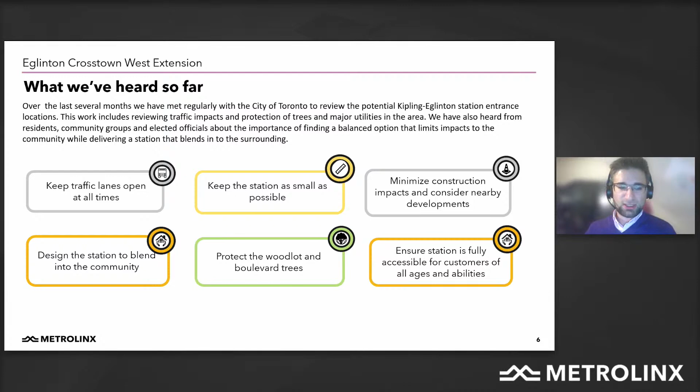So just going into the next slide, when we think about stations in general, and just to be clear, we're in the planning and design phase on the stations. This is all about us landing on where we want to put the station building, and ultimately how the station will function. We're not in a contract right now to build these stations, so this is the right time to get your feedback.

So we are thinking about how to make these stations, first of all, work and be easy to use and connect people well in terms of travel time and connectivity, how to connect with the local community, and how to protect the environment, while at the same time thinking about how we limit the impacts to private property, transit and traffic, and also deliverability. How hard is the station to build? And that also relates to the community impact. So the things that we've heard and our typical key considerations during the design phase actually line up pretty well.

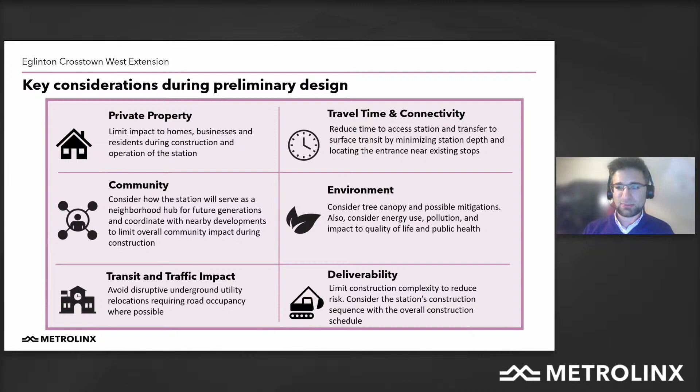And so if we move to the next slide, please, getting a little bit into our design principles. Can we advance the slide, please? Thank you. So a number of key design principles when we approach stations on our transit projects, and I will relate this to Eglinton Crosstown West. It needs to work in terms of helping to create an effective and reliable transit line, and also be passenger focused so that it's easy to use. User-centered design is this idea that people can easily understand how to use the station and that it's accessible and safe.

And these next two, number 3 and number 4, are in gray because they really get highlighted in the options that we'll be bringing forward. So public realm benefits and placemaking. You'll see in the options that there are ways we can use the scale of the buildings, the orientation, and the public realm aspects to highlight the local area. And a question that we're interested in hearing about as we solicit feedback is how do you think people will use this station?

Is it really just an in and out kind of place to access transit, or is it also about helping to create more of a place at Kipling and Eglinton? And then, as we've heard, context and integration.

So while these stations do need to, from an architectural perspective, speak to the other stations that are being built on Eglinton Crosstown, which are almost complete, and I'm sure many of you have seen what those look like. They do need to speak to those stations architecturally. That doesn't mean they need to be exactly like those types of 3-story Crosstown stations, so that there can be more thinking about how it blends in with the local context.

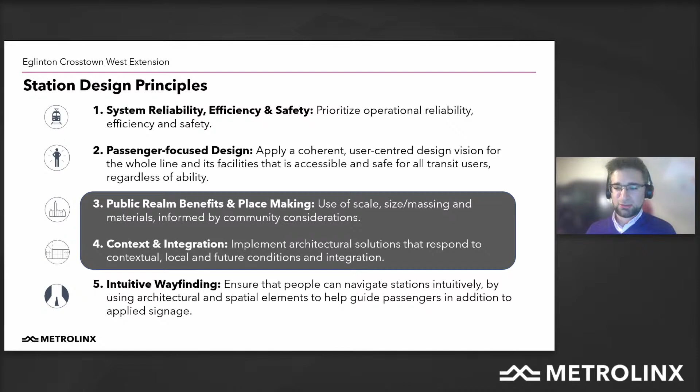And then the last point around intuitive wayfinding and making sure people can navigate easily. So if we go to the next slide, one of the comments and questions that we have heard from the community is, can you please make this station at Kipling and Eglinton as small as possible? There's a lot of natural features in the area with the woodlot, and just make it blend in and almost fade into the background, in some of the comments that we've received.

We're taking that into account, but we do want to highlight that there are important elements in each station that influence the size and shape. So it needs to be in line with the principles about being usable to customers, to all people with all different abilities. We need to provide elevators, barrier-free paths of travel, stairs and escalators, and circulation in a public space. And we also need to provide both a main access point and an emergency exit building, so that there are 2 points of egress in the case of an emergency.

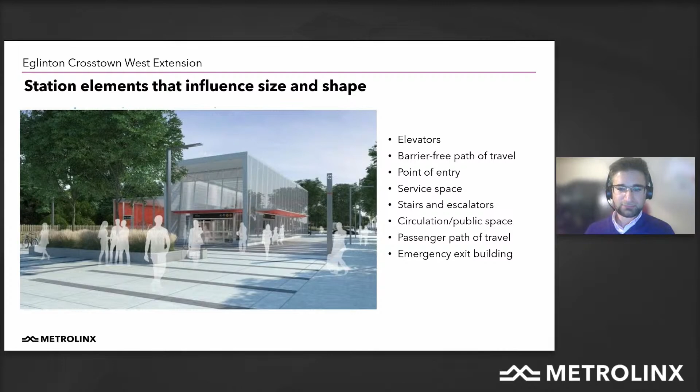So those are all factors that need to be considered, but I think you'll see as we get into the options, we have really tried to keep the station functional, but keep the buildings itself on the smaller side. And as well, our approach on the 4 underground stations is to really focus on one main station entrance building, so there's not a whole bunch of different station entrances. So the next slide, please.

So as I mentioned, we're into our design stage. We have not let a contract to build these stations yet. This is really the right time to get your input, and we have 3 different options for the station location that we'll be presenting. 2 we really think have a potential to be advanced forward. 1 has some pretty challenging constructability constraints, but this is really the opportunity for us to get your feedback on what you want to prioritize, and to hear how you think you would use it.

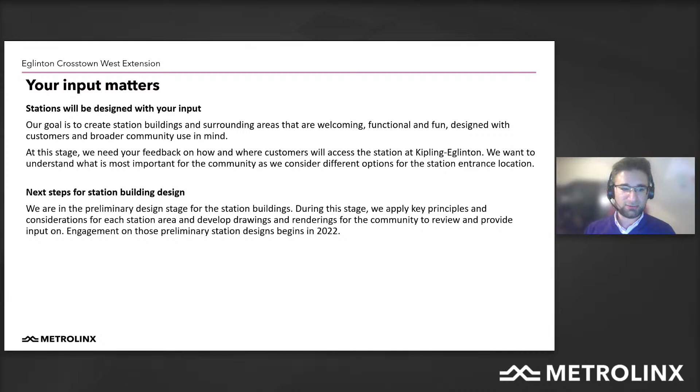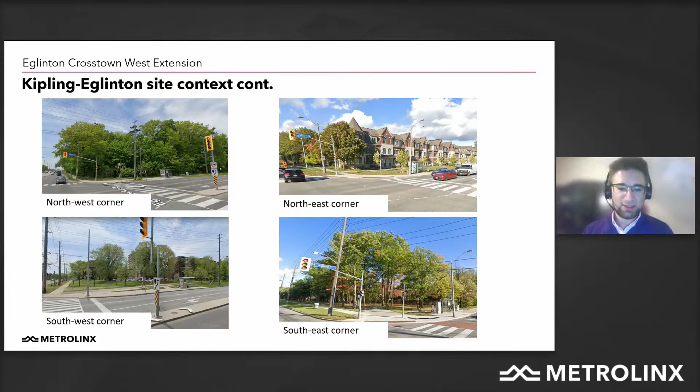And then just a little bit on the context. I'm sure many of you on the line are very familiar with the corner of Kipling and Eglinton. At the northwest corner is the Woodlot. At the northeast corner, you can see the townhomes that come pretty close to the street. On the southwest corner, there's kind of a wider boulevard with some trees and then the apartment buildings. And then on the southeast corner, there's quite a few trees, and on the south side, of course, is the multi-use path as well. And if we go to the next slide, I'll highlight a few things here before I hand it over to Sarah to talk about the Woodlot.

Kipling and Eglinton, the station in Kipling and Eglinton is the one location where the actual station box, which is the underground component of the station where the platforms will be and where the trains will stop, is directly under the roadway. And so you can see that black rectangle, the black with white inside rectangle reflects the location of the Kipling and Eglinton station box.

It is put under the road for Kipling and Eglinton for a couple of reasons, both because the townhomes are quite close to the street, so we didn't want to put the tunnel directly under any of those townhomes, and then, of course, because of the Woodlot. So at the other three underground stations, Royal York, Islington, and Martin Grove, the station box itself is to the north of the road, and that allows the construction when that station box happens to happen outside of the roadway. That's not the case for Kipling and Eglinton.

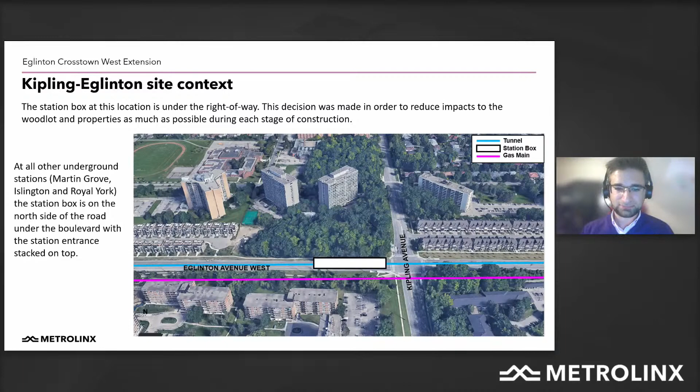The other point that I just wanted to highlight is that pink line, which is a major gas main. And as we'll get into in a little bit, if we want to do anything on the south side of the road, that involves gas main relocation, which is complicated, expensive, and takes a lot of time. So that will play into some of our evaluation of the options as well. So with that, if we take to the next slide, I'm going to pass it over to you, Sarah, to talk about the Woodlot.

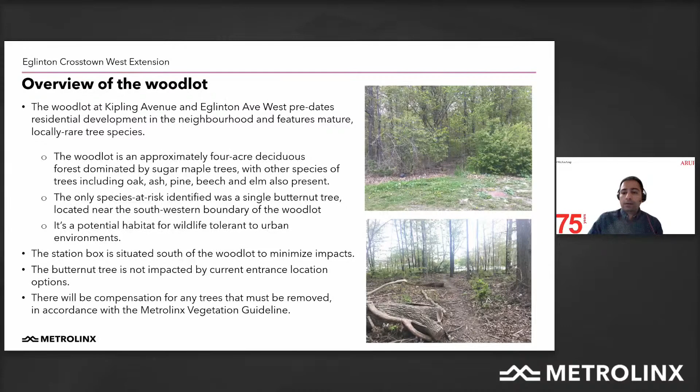So I'm going to take you through some of the considerations that we have had around station design and station box construction. So just as an early reminder, our goal obviously is to minimize the tree impact and traffic impact that we have around this area as much as possible during all stages of construction. And right now, the woodlot trees and boulevard trees on the south side are fully protected during the headwall construction.

The station box is underground, where the customer is actually going to get to the platform underground and get to the train and continue their journey. As you can see, there is a temporary traffic impact during the construction of the box when we start construction of the box for the station, and that's anticipated to be in 2024 and 2025, around that time.

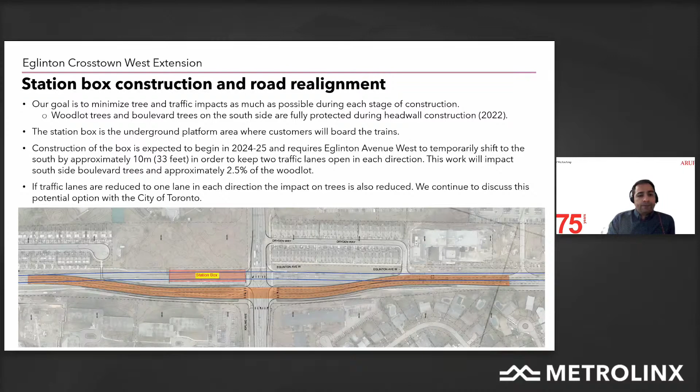As mentioned earlier, the station box is already sitting under the road, and the idea behind that was to minimize the impact to the woodlot. Then, in order to get to the station box, we have explored 3 options. The northwest option, where the station entrance and emergency exit building are located on the northwest of Kipling-Eglinton. A southwest option, where the station entrance and the emergency exit building are located southwest of Kipling-Eglinton.

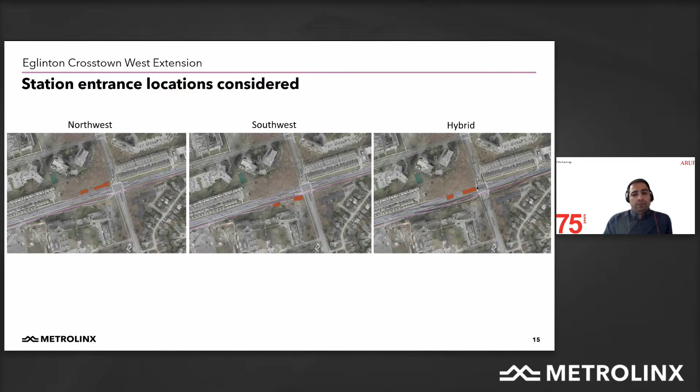And there is a hybrid stacked option, as we call it, where the road is shifted south and the station entrance and the exit building are located on top of the box, or partially on top of the box. Next slide, please. So I'm going to take you through each of these options and explain some of the characteristics of each. The first option, as you can see here, is called the northwest option.

In these drawings on the screen, you can see a dotted dashed red line which shows the station box under the road. You see a red area which is the station entrance and exit building, and a yellow space which shows the construction laydown area for each of these options. The northwest option is the baseline location, which is in the EA addendum and also the initial business case.

Some of the characteristics of this option: by introducing the northwest entrance, we have opportunities to improve the public realm and to use the woodlot and add amenities so that the community can better use the woodlot in their daily life. This option would impact approximately 20% of the woodlot, and through our surveys and impact studies, there are a few sub-options. Depending on which one we choose, we have anything between 17 to 21 significant trees impacted.

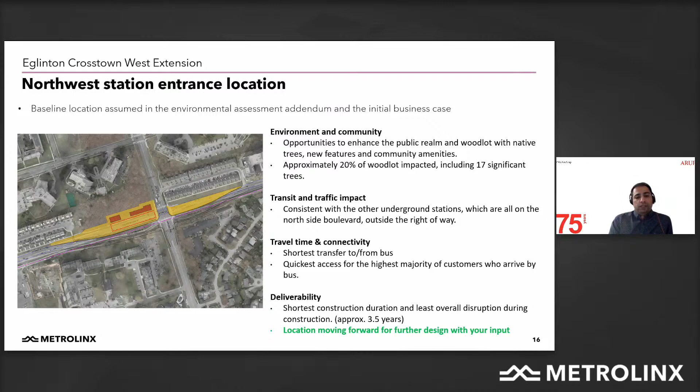We are looking at this option to still move it forward based on the feedback that we get from you and improve the design as much as possible. Next slide, please.

So as I mentioned, if this option goes forward, you can see the station entrance and ancillary building sitting on the northwest, and there is a gap between the station entrance and the ancillary building on the western side, where we are thinking to use some sort of public amenity, introduce skylights to the station design, provide a seating area with benches, and also provide what I call a gateway, both from the northwest corner and from the middle,

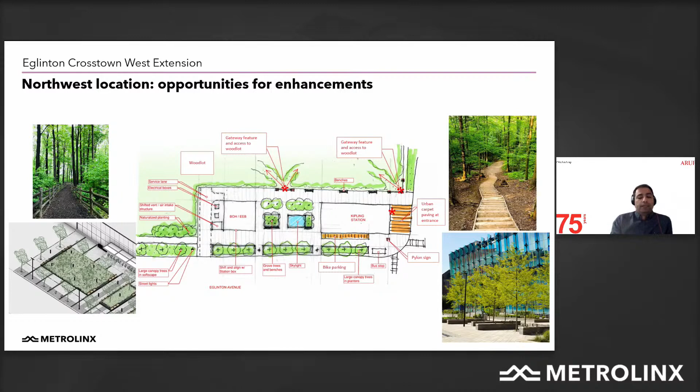toward boardwalks through the woodlot, so that it gets connected to the northwest of the community and gives neighbors an opportunity to use this woodlot more proactively. These are just examples of what can be done and improved in that area. Next slide, please.

This is just showing a very indicative schematic design, because we're really at early stages of design. Therefore, the design is not really shown to great detail, but it shows where this gap is, and then how it can provide a gateway toward the woodlot through public amenities and the kind of parklet that we can have there, and provide a kind of apron toward the woodlot and get us to the boardwalks that we can get through the woodlot.

Next slide, please. Another option that we looked at is what we call the southwest option. As Josh mentioned earlier, there's a significant gas main sitting on the southern side of Eglinton Avenue. If this option was chosen, the entrance and exit building would sit right on top of the gas main, and that meant that the gas main has to relocate toward the north side. And as soon as you relocate the gas main toward the north side, because we also have a station box sitting almost touching the woodlot, the gas main has to go north of the station box. That will immediately impact the woodlot, approximately 8% of the woodlot.

And sorry, next slide. I think you moved back to the previous slide. Yeah, no. Yeah, correct. So that will impact approximately 15 trees. I'm seeing a bit of lag in slides. Are you guys seeing the right slides? Omid, I think we are seeing the right slide. Okay, we're now seeing the right one. Station entrance. Yes. Okay.

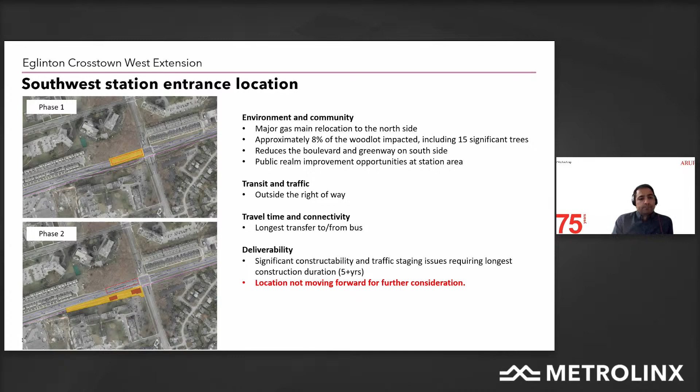And the last option that we looked at, next slide, please. Oh yeah, so I forgot to say. Here it just shows one of the challenges and complexities of moving a gas main, which happened recently on Finch Avenue as part of the Finch West LRT project. And you can see, it needs a significant amount of construction, staging, and coordination, and takes a significant amount of time to move the gas main to the right location. Next slide, please.

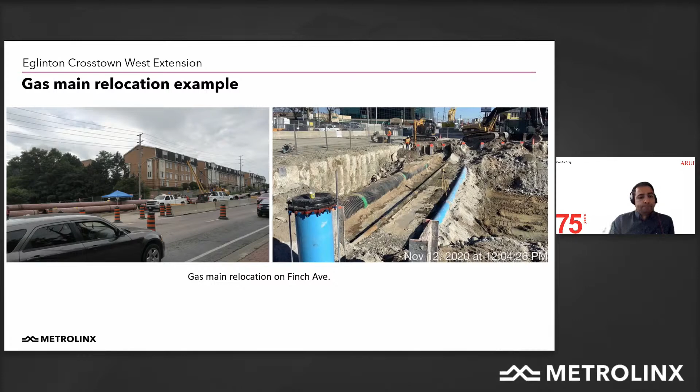So the other option that we looked at is what we call the hybrid stacked option, and that means that in the extreme case we locate the station entrance and exit building right on top of the station box. And the variation of that means that we start from the northwest option and shift it toward the station box as much as possible. That's what we call the hybrid stacked option.

What it means is that in order to achieve that, we need to move the traffic permanently south, anything between 3.5 meters to 10 meters, depending on which variation of this option we choose, which is equal to 1 lane, 3 lanes, or even 4, depending again on which option we choose. But this option is really trying to minimize the impact to the woodlot as much as possible, and we are trying to balance the impact to the woodlot against the impact to the traffic.

In the ultimate situation where the station entrance is fully on top of the box, the impact to the woodlot is about 7%, and the impact to the significant trees is only 2. So basically, only 2 significant trees are impacted.

There are significant opportunities to enhance the public realm around the station area on the northwest and northeast side of the intersection. However, when the road is permanently moved towards south, the south boulevard is significantly reduced, whereas it's balanced by achieving

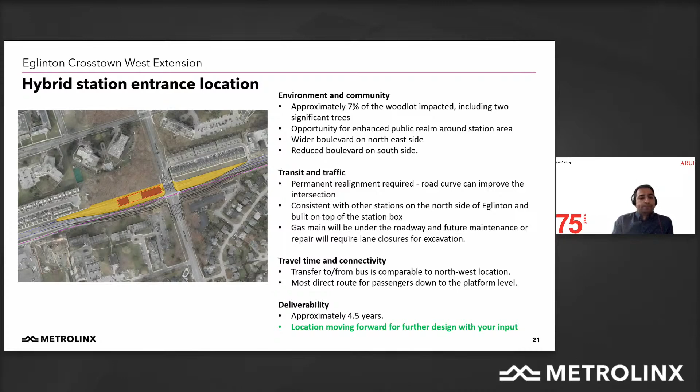So I'm going to now ask Maridelia to take us through the next steps of tunnel construction. Thank you, Omid, and good evening, everyone. I will be taking the opportunity to walk us through the next steps for tunneling activities and what to expect during the headwall construction at Kipling and Eglinton.

Now, prior to the arrival of the TBM at Kipling Station, the headwalls must be in place. In order to achieve this, the construction of these headwalls will be starting in the spring of 2022 and will continue for approximately 11 months, wrapping up in time for the arrival of the TBM.

To minimize disruption to traffic and residents, the headwall construction will be completed in stages. There are several aspects that were considered for this construction staging, including the relocation of a few existing utilities and the proximity of these headwalls to the intersection with Kipling.

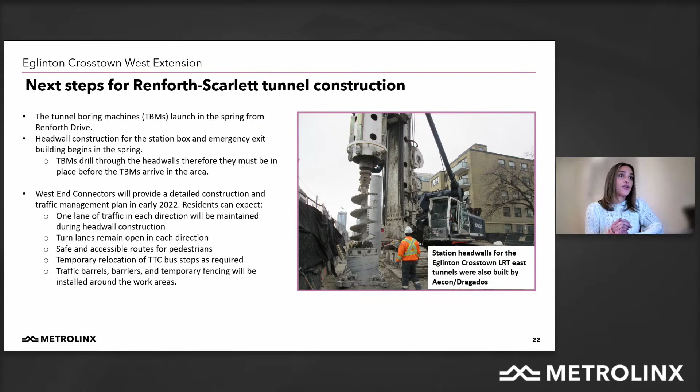Now, what should residents expect during construction? Lane restrictions will be in place, but these restrictions will be both temporary and dynamic in nature, meaning they will be adjusted as the different stages of construction progress. At least one lane of traffic in each direction will be available at all times along both Kipling and Eglinton. Turning lanes will remain open, and there will be access to safe and accessible pedestrian routes during construction.

Bus stops will be relocated as required, but sufficient notice will be provided to the community, and as much as possible this will remain accessible for the public and residents. We should also expect to see a clear delimitation of work areas in the form of temporary fencing, traffic barriers, cones, etc., to protect the public from inadvertently accessing an active work area. West End Connectors, the constructor, will be issuing a detailed traffic and construction management plan early next year.

And this plan will be carefully reviewed by the project team and our subject matter experts prior to its approval and implementation. At that point, we'll be able to come back to the community with more details on the specific aspects of these plans. There are many things to consider during this construction period, but these are the key items I wanted to highlight tonight as takeaways in preparation for construction activities. So with that summary, I want to hand it over back to Josh for an updated project timeline.

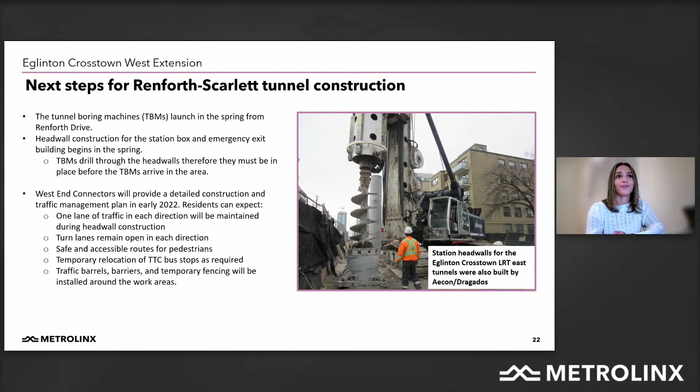Thanks, Maridelia. I learned a lot, that was very clear. Many of you, I think, have seen our project timeline in the past in terms of the work moving forward to be able to open the Eglinton Crosstown West extension in the 2030-2031 timeframe. There's a couple updates here that I wanted to highlight for you.

So the work now is actually broken out. Previously, we had talked about the Renforth to Scarlett Tunnel contract that Maridelia was just speaking about, and then what we called the station rail and systems contract. We have now looked at how we can separate out and advance two other pieces of the civil works. That includes the second tunnel, the short tunneled section from just east of Jane into Mount Dennis, called the Mount Dennis Tunnel, as well as the elevated guideway, the 1.5 kilometer section from Scarlett to just east of Jane.

We recently achieved a milestone on the project where we released the request for qualifications for the Mount Dennis Tunnel last week. That means we're starting to look for teams interested in building that tunnel. Later in the spring, we will be releasing the actual request for proposals to those qualified bidders. So still time to define the project and what gets procured, but we are moving forward with that tunneled section, and we also look forward to announcements regarding the elevated guideway soon.

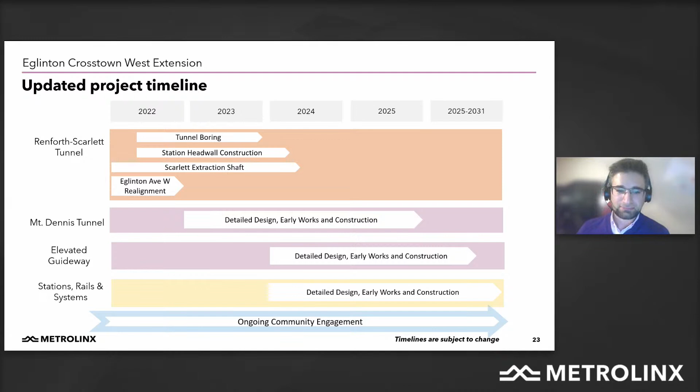So on the last slide, we're done talking and we can start to answer questions. We're really looking forward to your feedback, specifically on the topic of the Kipling-Eglinton station location. We mentioned we have the survey with just 3 questions, open until January 7th. There's lots of ways to contact us, via email, phone, Twitter, many different ways. If any specific individuals or groups would like smaller table discussions focused on the Kipling-Eglinton station options, please reach out through eglintonwest@metrolinx.com, and our community relations team can set up those meetings. We aim to finish this presentation by 7:10.

It's 7:13 by my count, so we're close. I'll pass it back to you, Joseph. Well, thank you very much. And thank you to all of our presenters tonight.